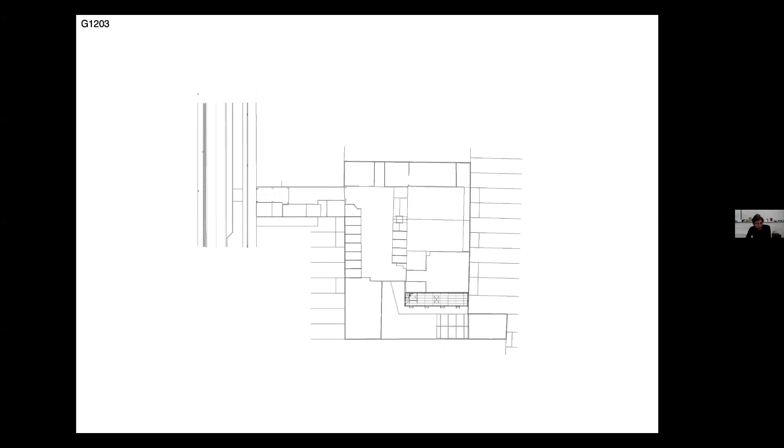So I've selected 6 projects. The first one is a project in Ghent where we did a kind of refurbishment or renovation of an old stone masonry. And you see it's a special location in the sense that you have a kind of courtyard, which is reachable from the street. And then it's really built into the fabric in a very dense way.

And here we stripped the situation and the whole structure, and we cut away the roof of this portion so you could get a garden. And then we convinced the client, instead of his initial question to kind of fill the whole space, to build a more modest, smaller house within the existing hall.

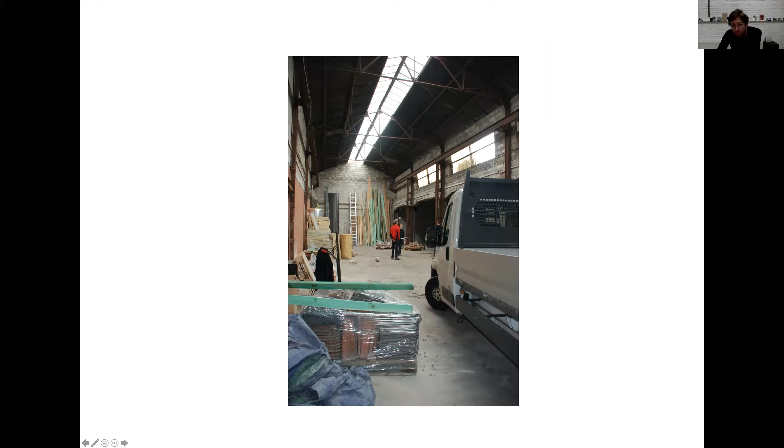And we were intrigued by the systematic base, which was a concrete structure, and there was a steel structure built into it. You can see it here. This is the concrete, and then the steel, which was later put in, and you could already see the layers coming. So they cut away the concrete beams and made a metal structure in there.

So we decided to add another layer to extend this kind of knowledge, to take simply the same base of the concrete rhythm and the steel, and then within the same rhythm we actually copied the structure in wood. And we were intrigued by a simple fact you find a lot in these old structures. This is a concrete beam with a kind of extension in concrete, and then the secondary beams are not on top of the columns. So they actually take 1/4 of the span.

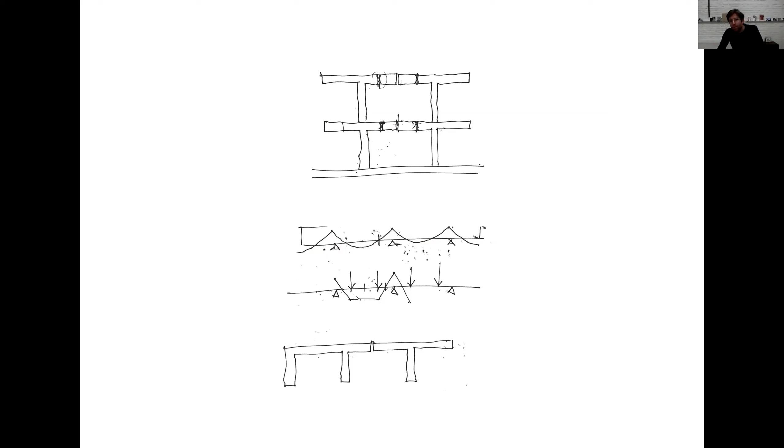And we copied this system because we talked with our engineer, Arthur, and he said it was an interesting way of optimizing the beams. And this is his first sketch. And basically by copying it, we optimized the structure, but at the same time, we also built into the fabric. And it's very important for us not to do a kind of pre-intervention. No, it's something that has to grow from the space.

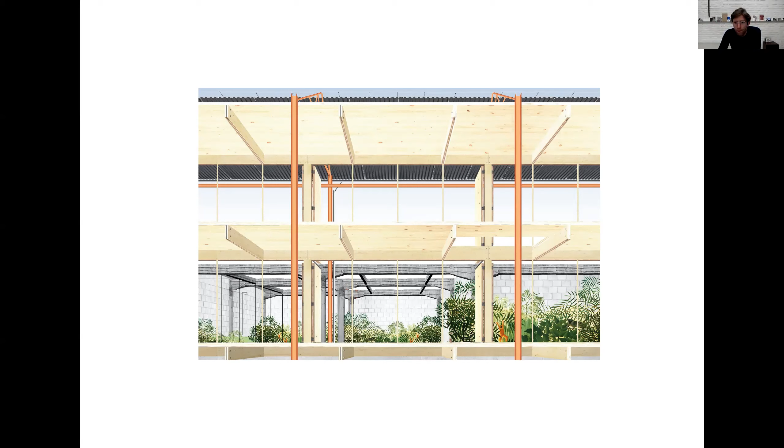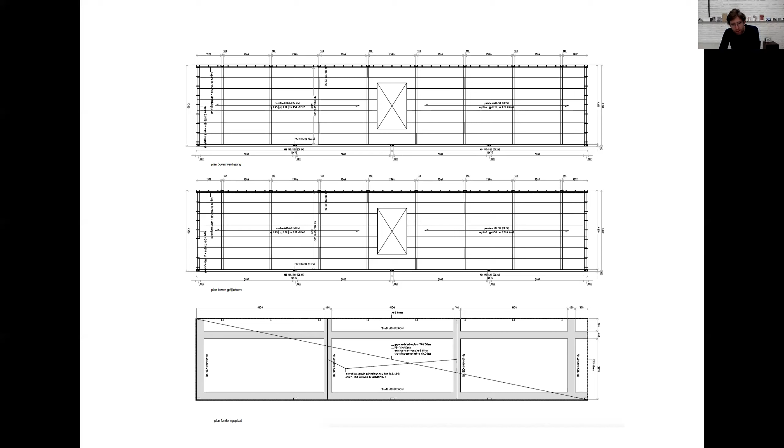And we simply did it at 3 levels, the ground floor, first and second. And we thought of it all in wood as a structure. And this is the drawing of the engineer, which basically is also what we did. Our projects, especially the beginning ones, but still a lot of times, have limited budgets, and you have to do as much as you can with the limited elements that you get. So the drawing of the engineer is basically almost a finished project, you could say.

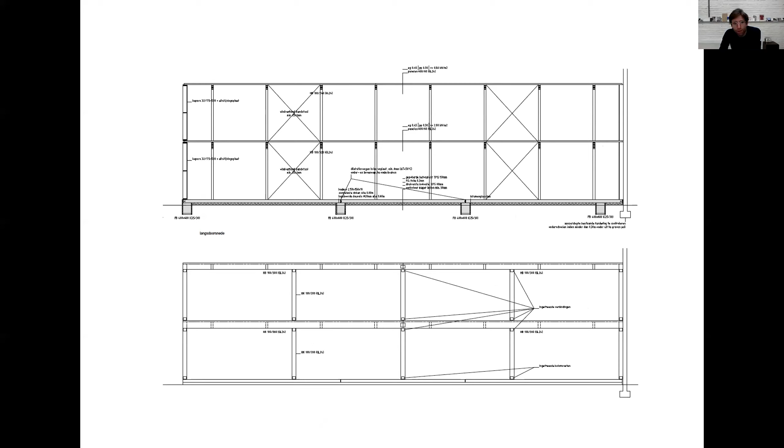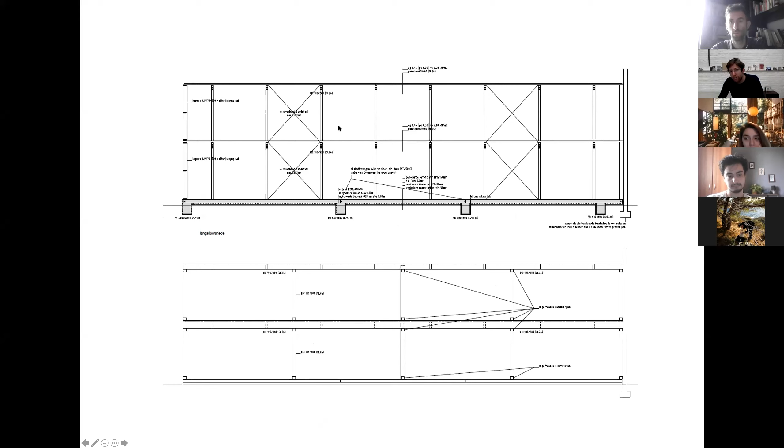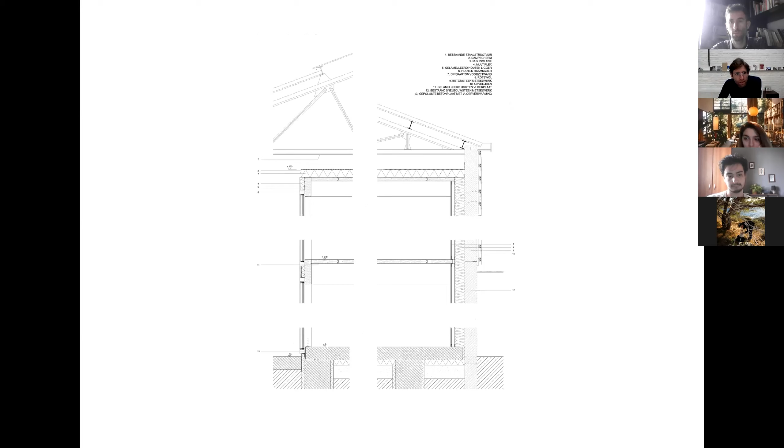What was interesting is that we did the floor and the roof in wood, and there are boards of 60 centimeters wide, but 6 centimeters in height, and they're already the ceiling and the floor, so there's nothing extra. There are no extra layers added, so it's already a finished product. And here you can see the construction drawing. We simply added a layer on top of it to finish it, because we really like the idea of a kind of basic structure that can be finished by the client.

And here are the details. And so the structure is perfectly clear. And then we added standard windows on the outside, but simply by managing interesting details from the inside, you get a kind of frameless idea of windows, but actually they're basic, cheap wooden windows. Just by applying them in the right way, you get this extra detailing.

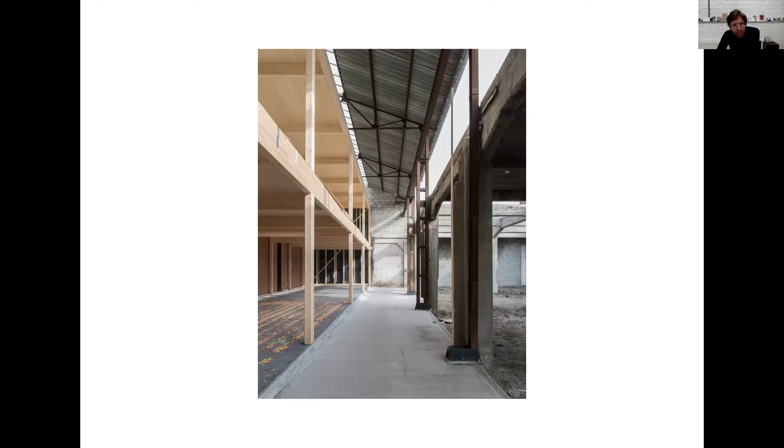And here you can see the basic structure, and there are no bearing walls in it. So it's all being done in different phases in the end by the client himself. We basically had almost a building package, you could say. But of course, we do manage a lot or think about the way the elements meet.

And here you can see it's almost like a massive wooden construction. But if you look closely, it's actually metal bars which are rammed into the wood. So you do not have any bolts or anything. It's just a way of dealing with friction in the components. And that's why it's almost made in one piece, you could say.

And this is then the structure. And for us, these construction moments are very important. We also do our photography ourselves, and we go to the site, and basically then something already has to happen.

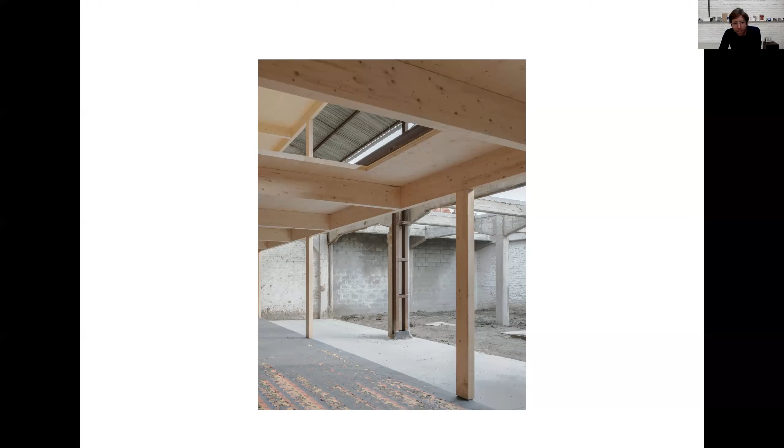It's not that we wait for the finishing; the energy of the project should already be there. And we're very conscious of the idea that this is a primary structure which you actually give to the client, but also afterwards he can sell the house and somebody else can make it his or her own. And in that sense, it's almost a kind of framework for life, you could say, that we offer.

And this is the way you approach the house. Here you can see. So what we did is we kept the initial shed structure. And what we did, of course, is to build smaller than the width of the plot. So you already see here the canopy that serves for the protection against overheating, but also to have this kind of flexible in-between space.

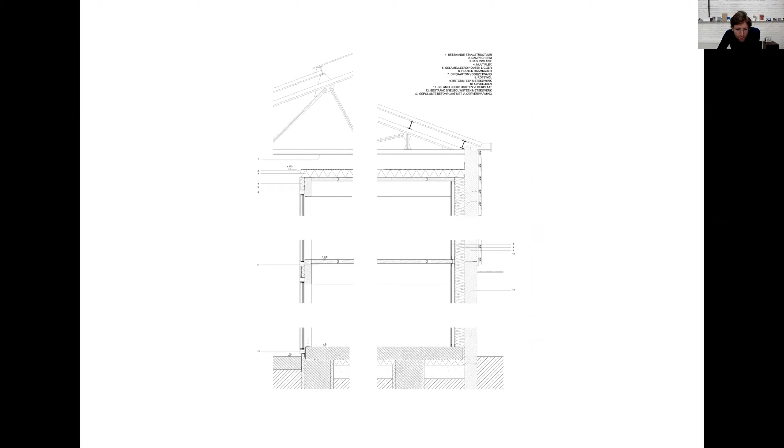And maybe some nice things to prove that we really try to find the edge. If you see the floor, this is a basic concrete floor, but it is already the foundations that you see. And maybe I should go back to this actually: the structural floor is on top and the insulation is in the bottom. So there's no extra layers on top of the foundation floor. And in that sense, it's the most basic you can do.

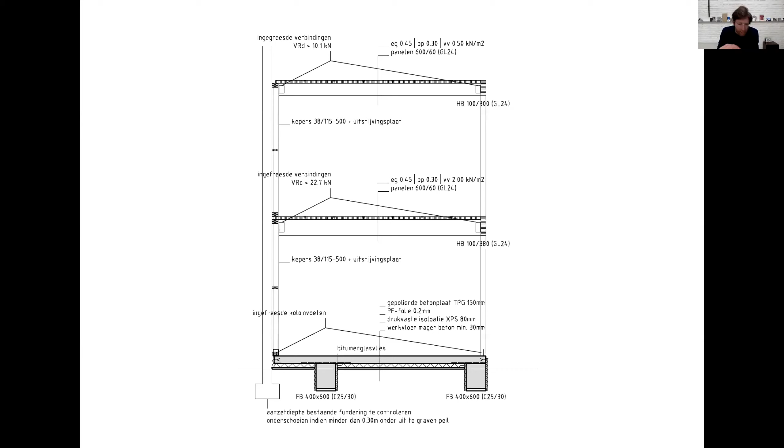It also limits the discussions with your clients of what type of floor should be in the end there. I mean, these are things that you will all experience, these kind of nice discussions. And because of just limiting to this and it's only budget, what we did was polish the floor, and you see the stones basically in there.

And what's of course important with the engineer, he thought of a system. They use it in industrial construction. Here you can see this line. It's a metal reinforcement which allows the structure to move in a horizontal way, but not in a vertical way. Because the floor heating is also attached to the reinforcement bars, the structure would move and it would crack, because it's 20 meters long, and you would simply get cracks in your floor.

So in that sense, it's using these industrial ways of working, because that's the way they do it in industrial buildings, but finding a new way of applying it here. And it's interesting that people ask, okay, what kind of stones did you put in your polished floor? But it's actually just simple concrete which you polish. And in that sense, it's interesting for us that people often find things beautiful because they are logical, or something has grown to be beautiful simply because it is simple.

And as soon as people start to have to make choices, it's more difficult. You really need this taste level to kind of fix everything. But that's not what we do. We basically make a kind of package, and the building comes from these decisions actually.

And then a simple idea is that the opening windows are closed; we fix them with wood, and then the fixed windows are glass. And the idea is that in the summertime you open up the shutters, you could say, and then the whole box is transparent. So in that sense, you play a bit with open and closed particles.

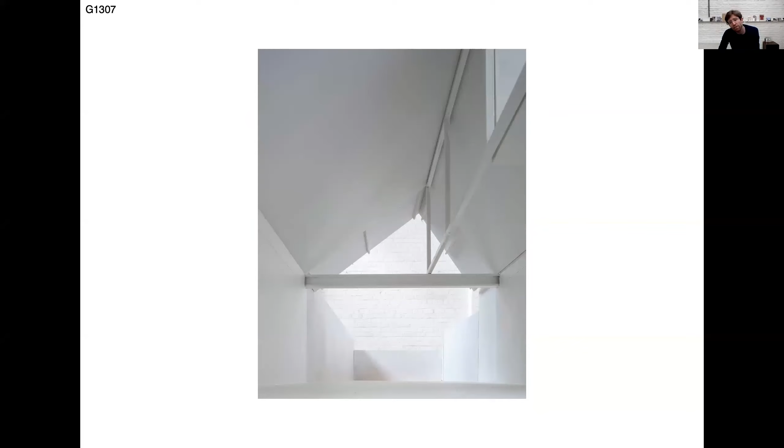This is a small extension we did also for a friend of ours. It's a very typical, common work among architects. It's usually the first things you do, these kind of extensions here in Flanders. And it's always a limited budget, but also how to make something that is particular, how to deal with always the same question, but giving it value.

And here we wanted to give as much space as possible. So we had this sloped roof idea. And we had these discussions with the engineer. When you do a sloped roof, you have these kind of forces and you should put cables to hold it together. And we wanted to avoid these because it's quite a big roof. And we came up with the idea of stiffening the central beam, and not by making it heavier, because we didn't want that.

We made a Vierendeel truss, which is 2 meters high, but very thin. So in that sense, it's a very delicate element. But we really like the idea of being stiff in one way and almost too thin to be constructive in the other. And we simply laid it on top of one beam, which is on top of the party walls.

And here you see again, we try to find clues in the existing. For example, this line is a very typical line because of the stairs. And then we continue this line, so there's no discussion about this line. So in that sense, we always try to find these alibis, you could say, which tie the project to the existing. And in that sense, it's a very simple plan.

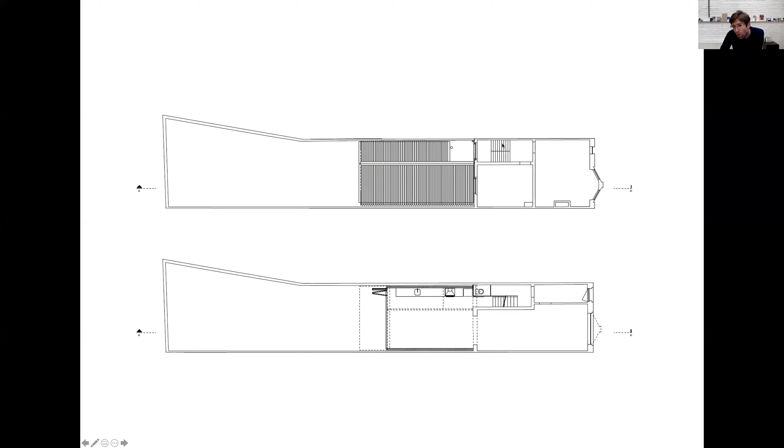And then obviously, if you have this kind of roof, you have this window, which is a bit lower, which is here for the staircase. So we simply cut out a portion of this roof, and then we could also bring light in there. And by dividing the Vierendeel truss, into 3 squares. You can have one which is a window to get light in, because we cannot handle the idea of just putting a roof light somewhere. We want to know why, how big.

So this is just simply a system, and then the problem of always bringing light into the darkest part is in that sense solved. And also what was interesting is with the engineer, we came up with the idea of this Vierendeel truss. Because of it being very slender, it is not a frame. So in that sense, it's more like a truss. You have this kind of diagonal, and you could have the same on the right side.

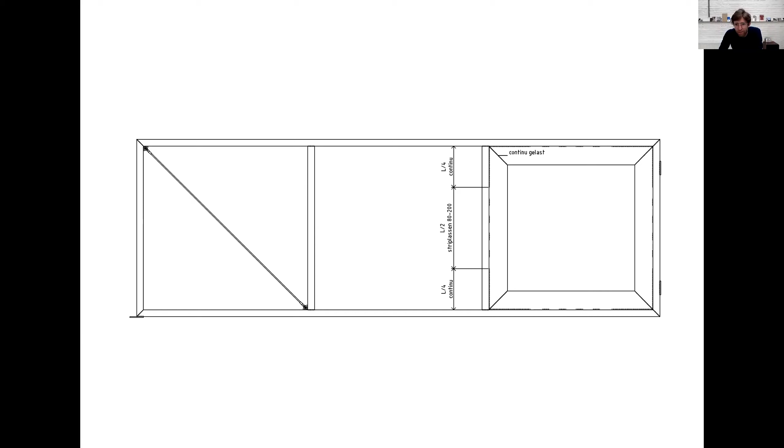But as you can see, you also have the thickness of the roof with the insulation. So we had another way of stiffening it, and what we came up with was just a thick plate of steel, which is welded all the way through. So it's the same way of stiffening this, but in another way. And of course, by that, you fix the thickness problem. But we like it. It's almost a kind of educational drawing of what types of ways you can make it stiff.

And this is the element we had to put on it. The engineers or the contractors were saying it's really unstable, but by putting these insulated panels on 2 sides, you can stiffen it also. So again, like a lot of architects, we're very influenced by Prouvé, the way of using standard elements, trying to find something which is not generic, which is very contextual, and also the hybrid character. Every element works, and in the end, it's a whole. Every element is at the edge of the forces, at the limits, and that's what really interests us.

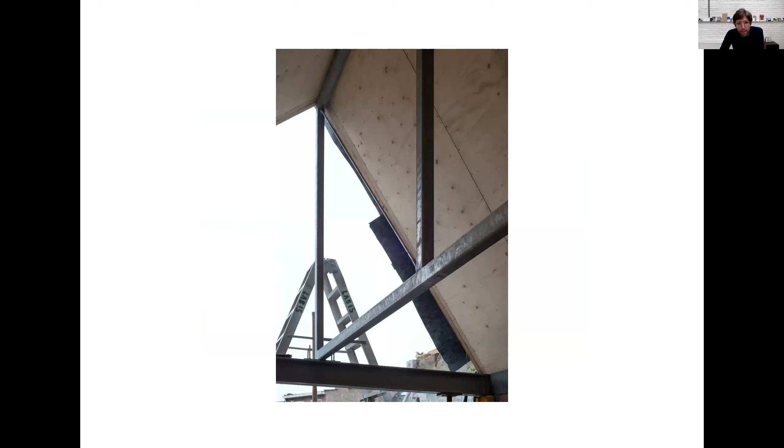And these are a few construction pictures, and this is the final picture we took. Also here, simple things. We wanted to have a kind of canopy, but something very simple, so we had these Z profiles you can see there, which are used in this type of steel construction. Because it comes from the roof, you can have them very slender. Normally you would have a thermal break, making something very heavy. Now we come from the roof already, so it can be very thin.

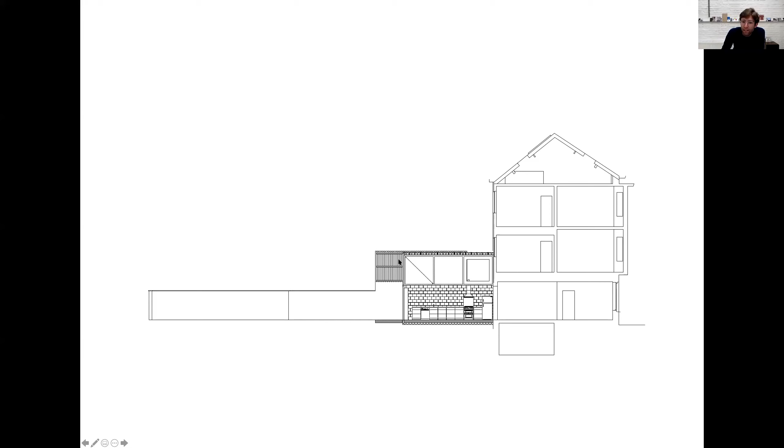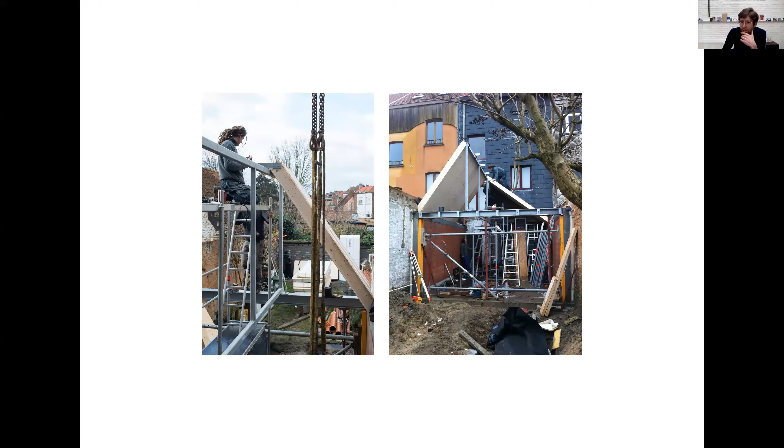It's a Z profile which we doubled, simply putting two of these very thin profiles into each other, and that's why they're twice as strong. So with these basic elements, which you would normally already need to fix your corrugated metal, you can already make a kind of span. So these are very simple things, but we like the fact that you could almost build it yourself. These kinds of things are of interest to us.

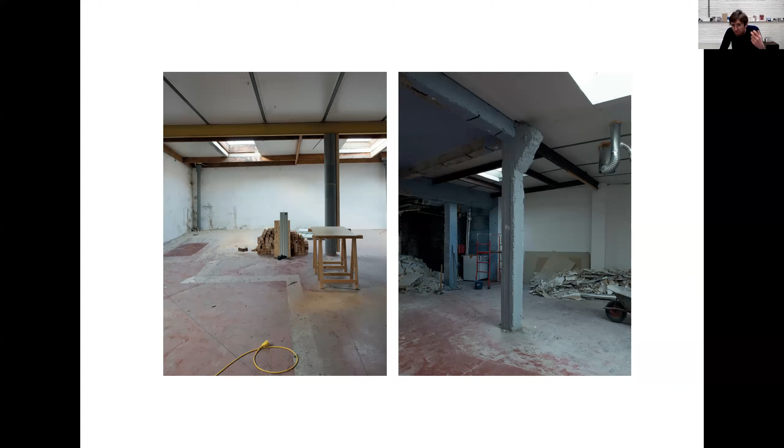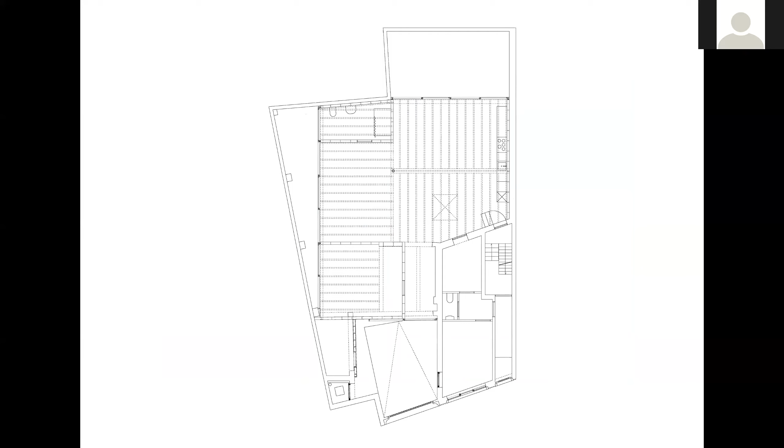And this is the plan. Here you have the front house. Then we integrated the biggest rectangle we could as one large space, and the leftovers are the outside spaces, because we really like to do one basic action, and then things should come. So the outside spaces are just a result of this simple action.

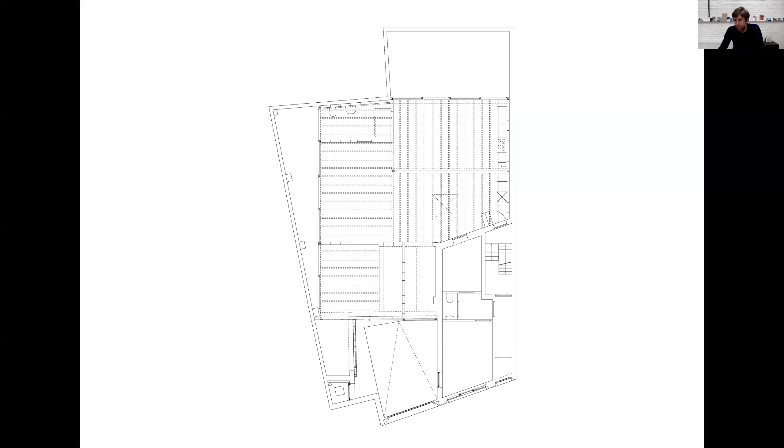And then you see that the project is basically a whole wooden roof, and there's one column, and this is this round column. It's nice that if you have one column in the whole project, this column starts to have a kind of importance somehow.

Then we had the party walls, of course, and the layers of the rooms. We did it in this insulating stone, which is normally the first stone in your construction because it's cellular. But we decided to do everything with this stone because of its insulating capacities. Of course, it's very delicate. It's not normally used for this type of construction, or at least you should normally plaster it. We didn't, so we really took care of this stone on the construction site.

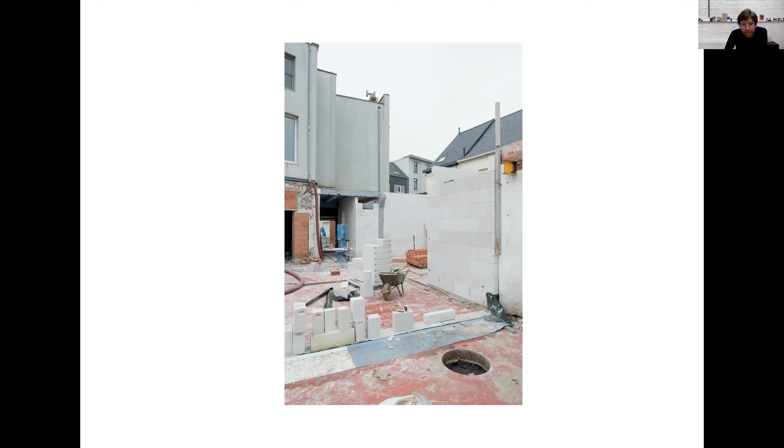And we built on top of the old existing floor, because demolishing it would have been too expensive. It's also nice to keep this as a layer. And then we simply cut big holes to put trees in there.

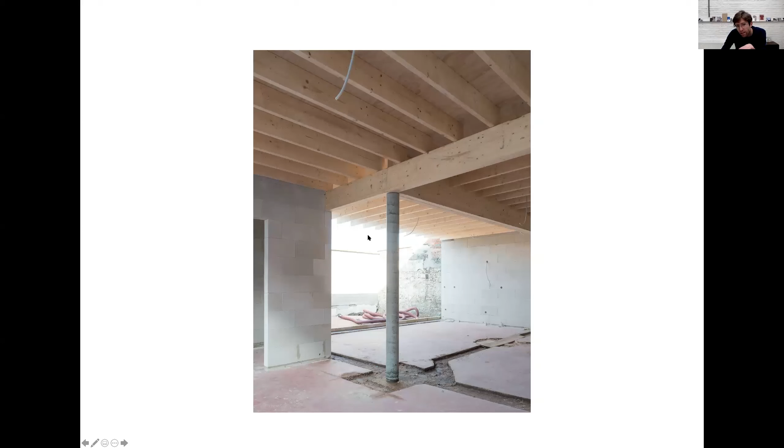But instead of putting a beam underneath, we did the reverse. Normally you have this higher portion to close the roof, but we made it structural. So we had an upside-down beam on top, and we hung the secondary beams from it. That way more light enters the room because you don't have the beam underneath.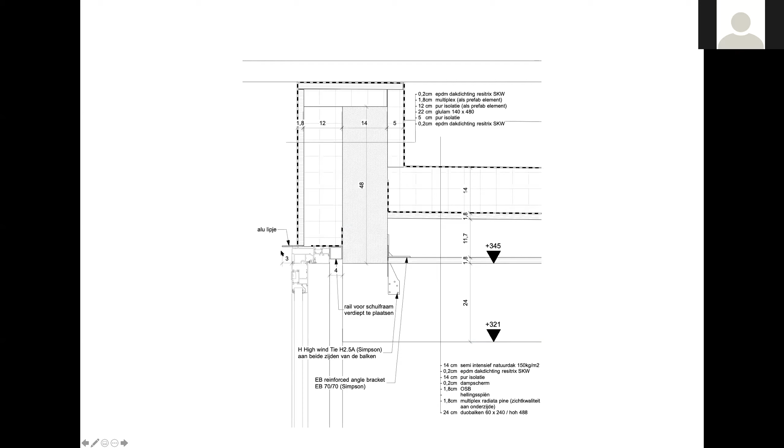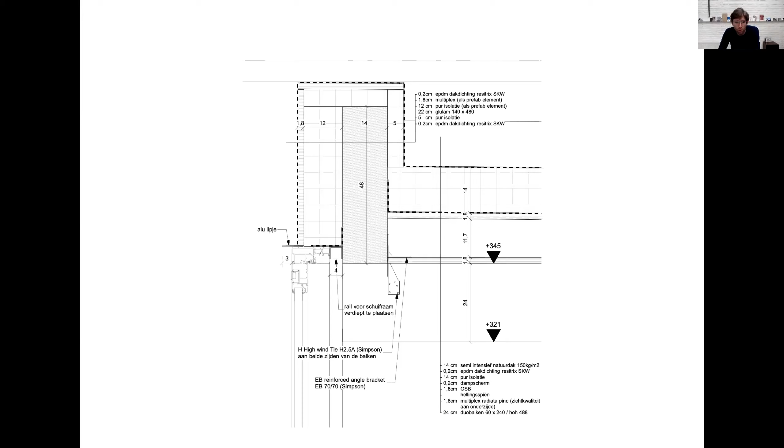And simply by detailing basic windows, but higher, you have the same idea: from the interior you see less frame, and on the outside you can see it. As a finishing, it's all roof material, which we just continued all the way. We try to finish the structure with these basic elements, because in terms of costs, one contractor doing a lot is easier than many different materials. So we keep it very basic, and that way we have control over the situation.

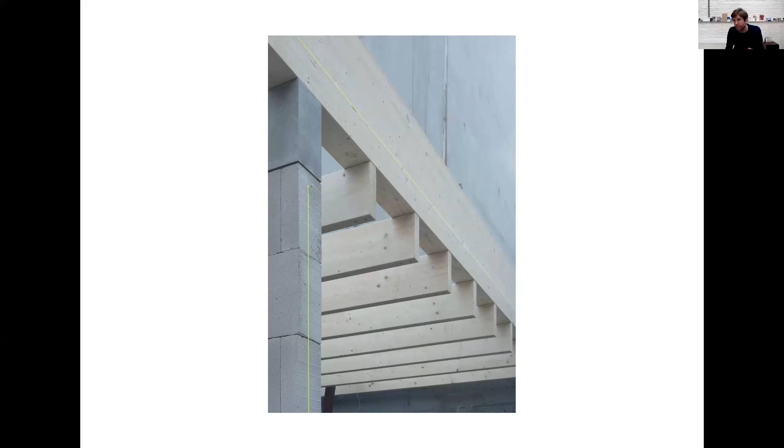Here you can see the beams suspended from the upside-down beam. And when the forces become too heavy for the stone, we have prefabricated concrete elements of exactly the same size as the stones. These are things we look into to get right, because if you poured it on site, you could never get it right. So it has to be prefabricated.

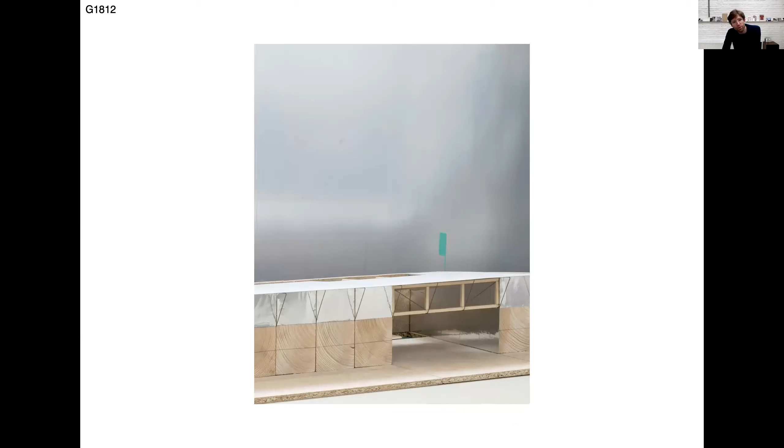And then a bit bigger project, which is for a woodworking company, which we got to know very well. They worked at the site. We are at an industrial site, and they also had their factory there, and we kind of started working together. And now they asked us to make their own factory, the new factory.

And it was an interesting experiment because of the scale, but also again limited means, and trying to work with basic industrial elements, because if you look at how these buildings are made, there's a kind of very fixed pattern of the concrete system that you always need to use. And we came up with an idea.

First, of course, they wanted their production hall, and then in front they wanted this fancy office, right, to show who they are. And we convinced them, okay, no, just do one nice hall, because that's what you are, that's what you do, and try to invite people into your world, you could say. And we came up with the idea, instead of a front parking and then this fancy office, we actually put the whole building more to the front.

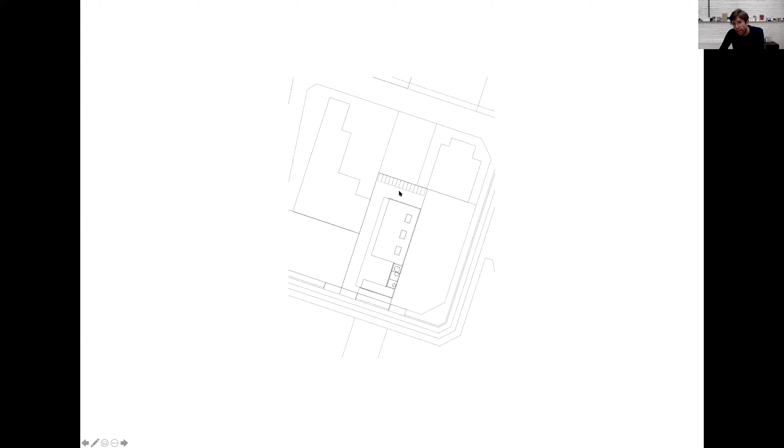So you get a limited parking at the back, but we came up with the idea of a kind of covered space, because they also had to get the products there and then unload. And we offered them, because we really needed to convince them, because it was not easy, because it was extra and basically they didn't need it, you could say. We offered this very big covered space as an entrance space as well for the unloading dock, but also for the offices they had. So you can come into this world, you could say.

And then we had a simple concrete column system. And of course we had to cut this with the Vierendeel truss, which you remember from the past project. That's why I put them after each other. They're like simple ideas, but you get them into your head and you take them to the next project, you could say. And there you cut them, and then you put the Vierendeel truss.

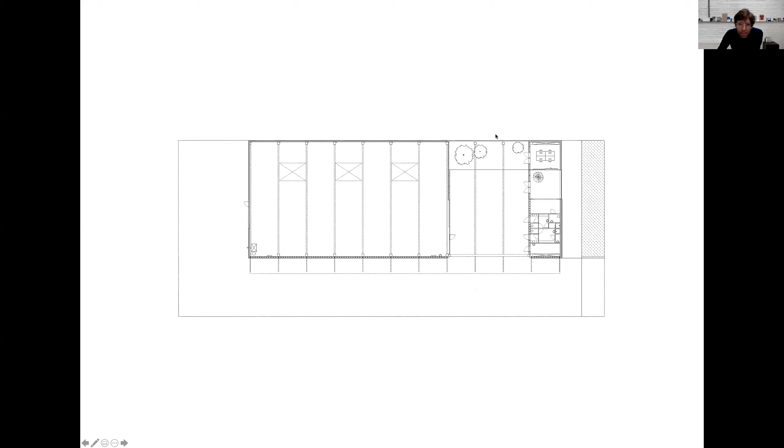And then here on the right, you have these offices, very slender in one bay. And then you have the covered space with a kind of outside courtyard. And then you have the main production hall. And these are the three different sections of the site. On top is the production hall. Then in the middle is the courtyard, which is open at the end. And then you have the working space, you could say.

And then these simple different sections always give you a kind of, with the same facade, because you have 4 meters of glass, and then we have a wooden facade. So you have here a very top lighting, and then here it's covered, and then here, because you're working on the first floor, you have a different relation with the roof light.

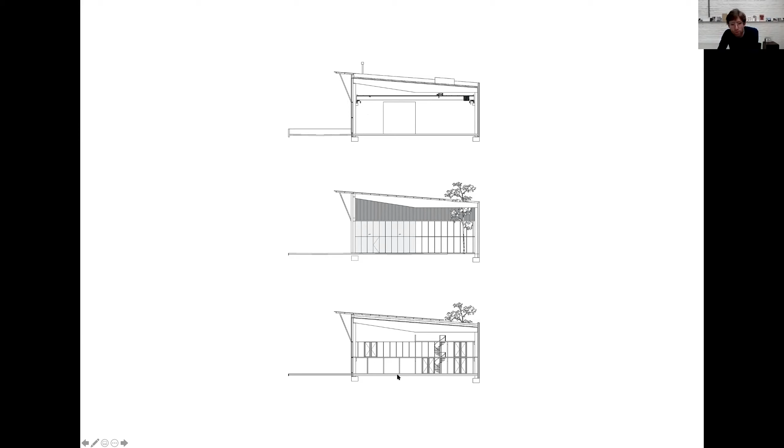And then, of course, important to say is that for fire regulations, we had on the other side a concrete U shape, but then we put it fully in wood. Because of doing that, obviously they could make it themselves, but also we decided to cover it to protect the wood, and that's why you have this kind of shadow also for the window lights you have above. So it's a kind of double way, but it's also interesting to have this character on this side, to really have a different expression, you could say.

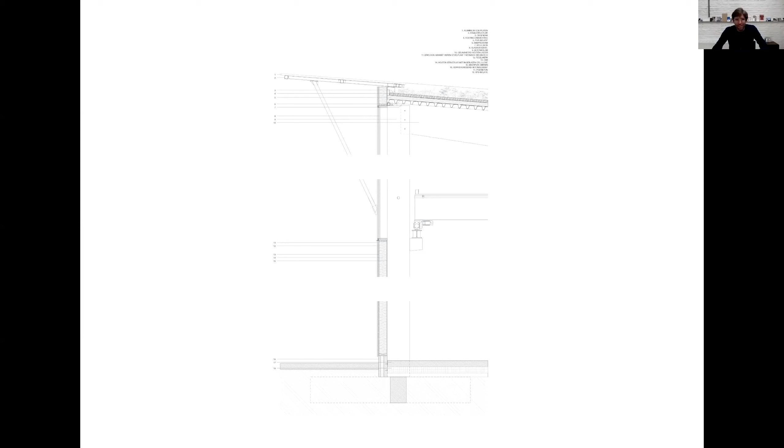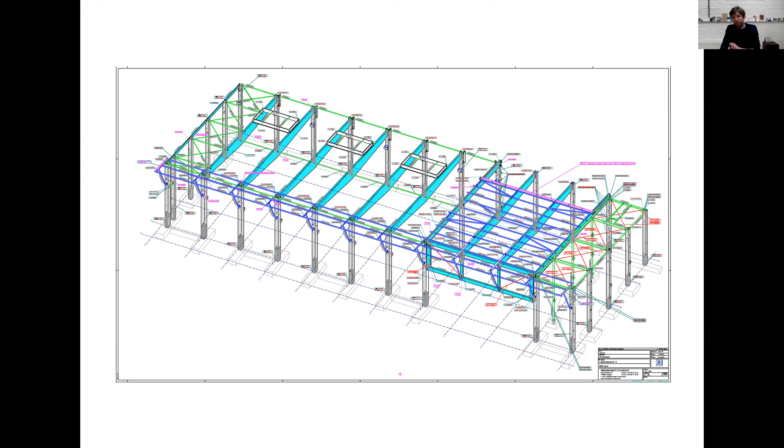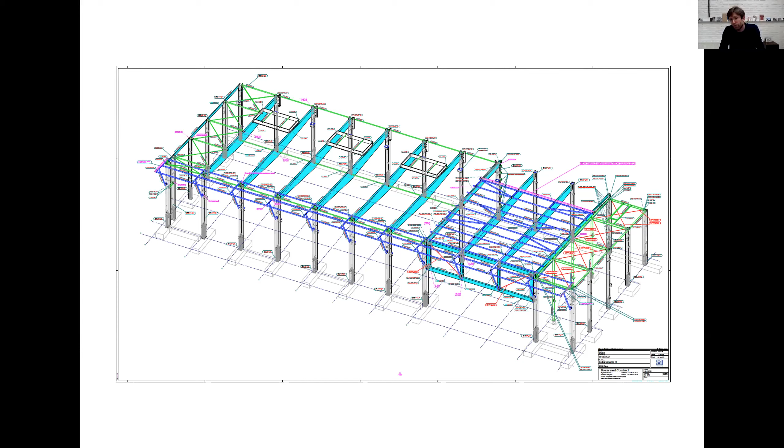And this is then just the way you get it back, and then it's a way of negotiating, because it's again limited budget. They're also contractors themselves, so they kind of rely on us to ask some questions. We draw some details, but it's not like you have every bolt under control. So it's always a kind of negotiation, but it's interesting because if your ideas are strong enough, then usually they will stick. And in that sense, because of course you know each other, you can have this interesting dialogue.

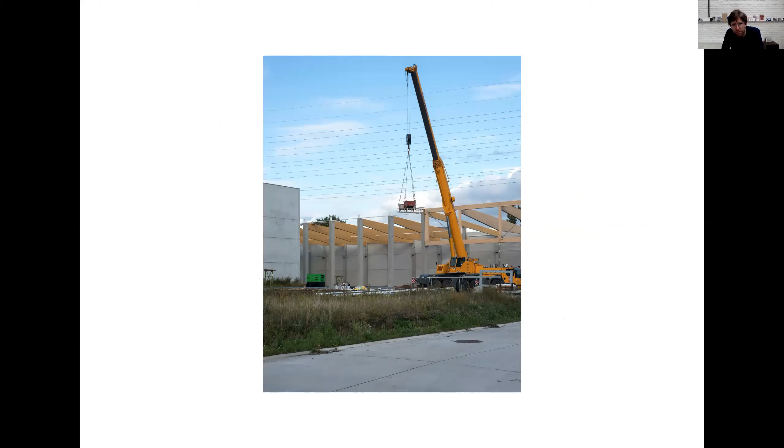And these are a bit of the construction photographs. And the scale was, of course, impressive for us because of the height. And this is the Vierendeel truss as it was first erected. So again, at the construction site, there should already be something which attracts your eye.

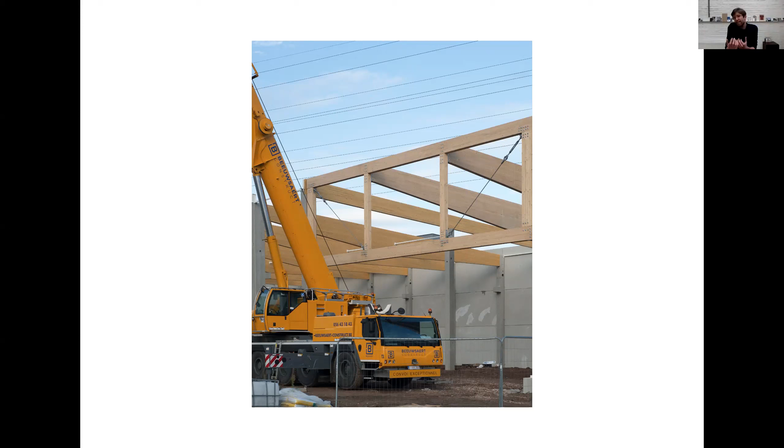But it's also just taking something they always use, because they're building a lot of factories also on the other plots, and they're all using the same thing, but as a normal thing. So it's basically looking how you can do something else with the same element. And that's what we really like. These are the canopies as they're constructed.

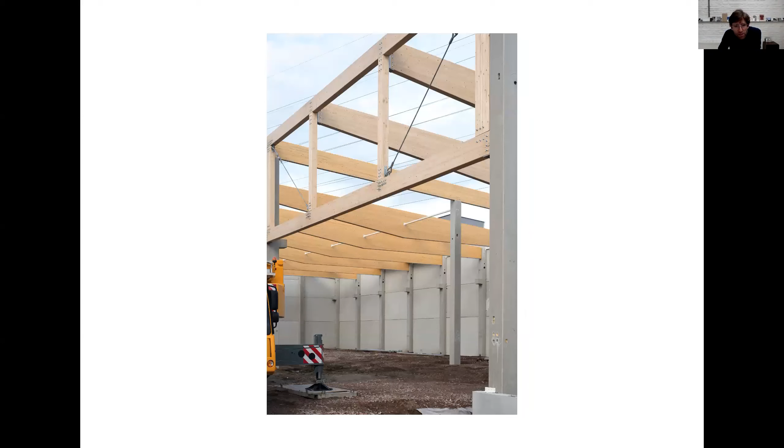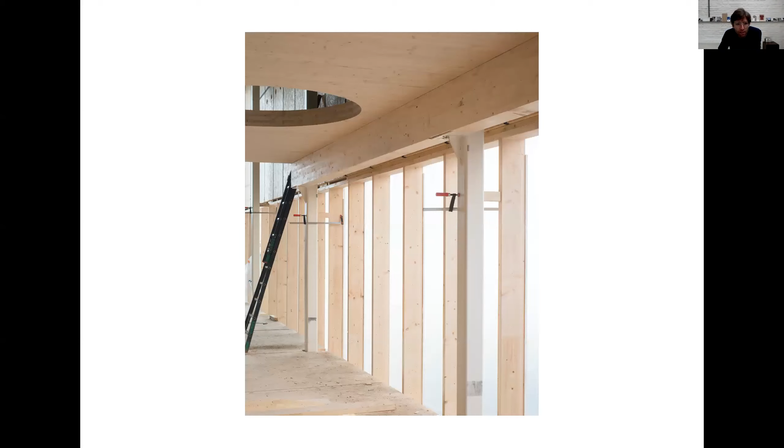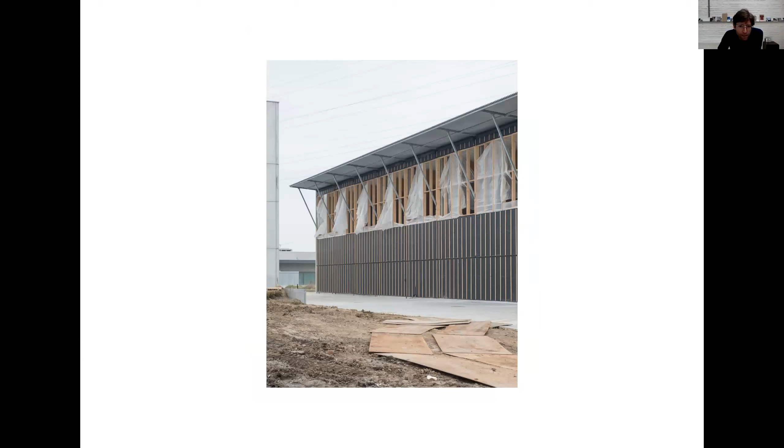And then when they're finishing the interiors of the space, and this is the offices, which is cross-laminated timber as they built it within. So it's a timber structure built within the concrete structure, actually. And then when they were installing the facade, we really like the play of rhythm of all these elements, which have their own logic, but brought together, they become kind of complex systems.

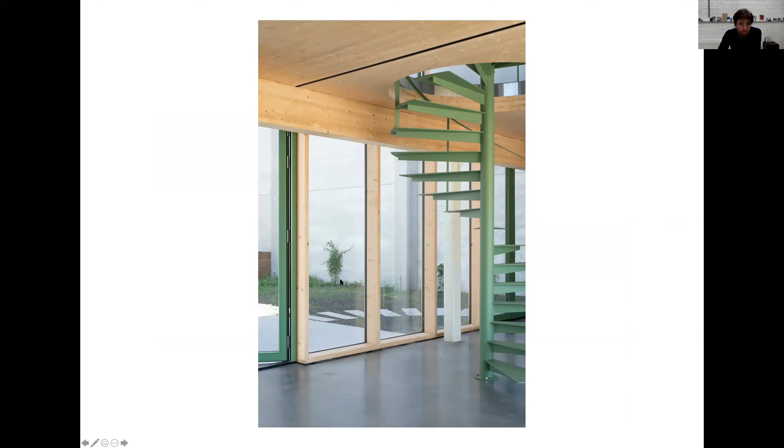And this is the interior of the factory then. And it's always the direct relation with their courtyard, which makes it interesting. And this is then the facade as it is finished. And now they have constructed something against it. They made this themselves, but it's actually interesting that they continue to kind of build this thing.

And then the last project is a chapel we are refurbishing into a house, and of course, very interesting is the location, but also the heritage was this kind of negotiation of how to deal with this heritage. And what was important is that we did something which was reversible. So you could do something, but you have to be able to take everything out, and then the chapel is untouched again.

So in that sense, we came up with an idea of making a steel construction within the old framework of the chapel. And also here, the client is a metal worker. So in that sense, it of course made sense that we did everything in metal here, and then we have this close relationship to design all the details with him.

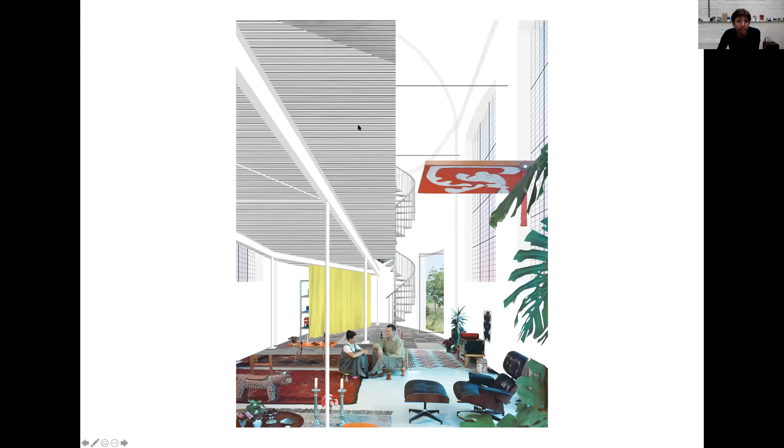And the main idea was to have a kind of central beam, which is the longest possible, which enters the chapel. And then you have this kind of ceiling on top of these two lines, which is in metal steel deck. And it extends to form, on top of it, a hallway. Here you can see the different levels. We put just simply 2 levels, and this is a central beam. So again, it's a play with this central axis.

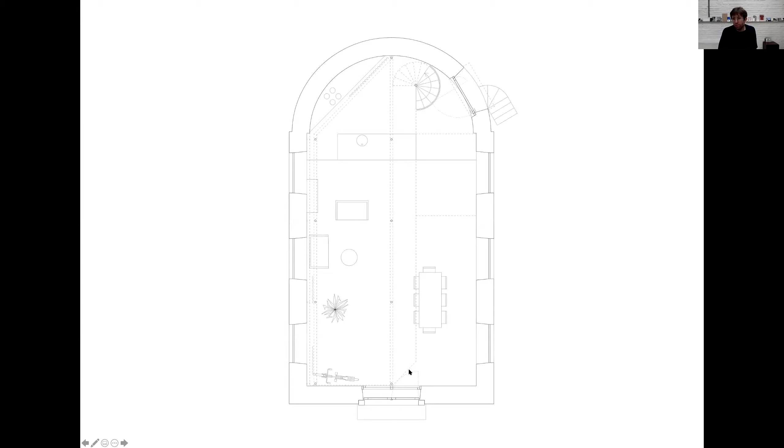And what is interesting is that we suspended the steel deck. But of course, if you would continue it all the way until here, you cannot enter the door anymore. So we closed one door, but then we cut away on one angle to be able to open the door. So again, there we go to the very limits of what is possible, that there is a kind of friction between the old and the new. That's what we like. That's what makes it interesting. It's not possible to shift it a little bit or something. It has meaning to the place.

And then here you can see the construction, and we did a lot of work on it. It is not welded on site, which was not possible. So it's prefabricated, but then normally you have these extra welded plates and bolts and stuff like that to kind of put the construction together.

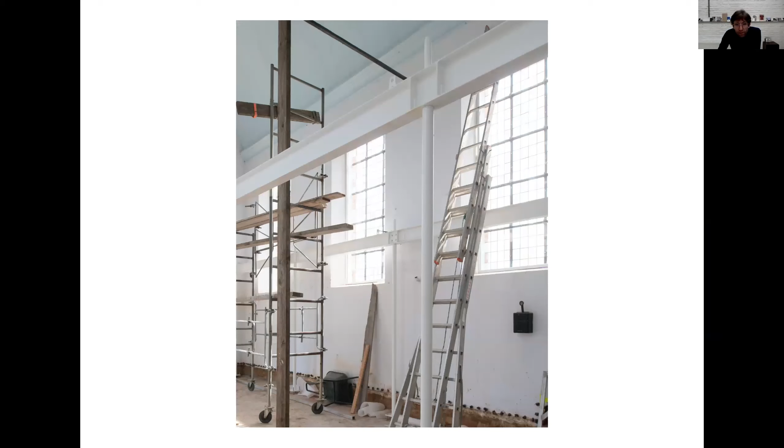And we made a kind of system, here you can see it, it's like a pin which is welded on top, and then a hollow tube which is put over this metal pin, and then you have these fine elements to fix it. So in that sense, it looks like it is welded, and we had a lot of discussions about this.

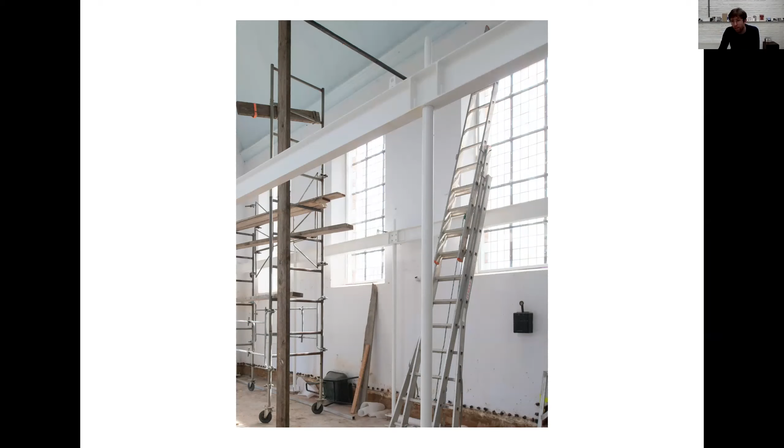It's basically what Mies van der Rohe always does, he welds everything on site, which for us is not possible. But it's interesting how simple he gets his construction, and how it is about construction, but it's also about the refinement. And we really like this delicate balance.

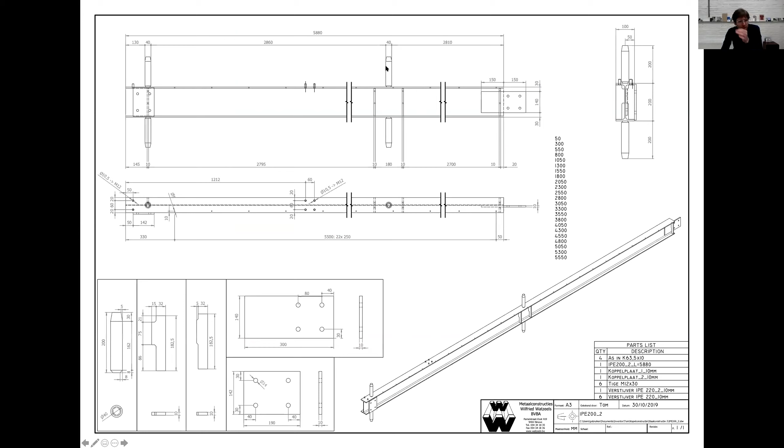And here are some of the construction drawings. I won't get too much into it, but simply because the beam cannot be in one piece, you can have an interesting element to join them together. But it should also have the beauty of the connection itself. So it's all things that we like to think about. And of course, I think these tubes are 5 centimeters, so they're very limited. So this kind of delicacy is also of interest to us.

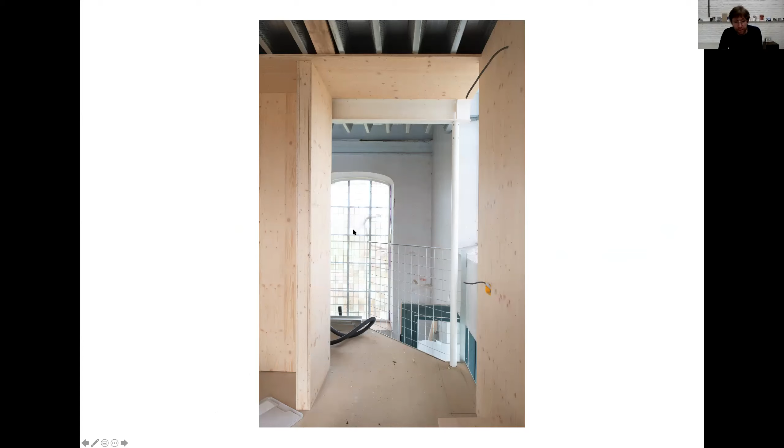And here we're now starting to finish the interiors. So everything is built in wood. And then also interesting, just simple things, like how to make a balustrade, a kind of protection. It's interesting because it's a dry system. So the steel deck is higher than normal because we do not have a concrete layer. So it's a bit higher, and there's only a wooden plate on top of the steel deck. So basically you don't have anything to fix your balustrade to.

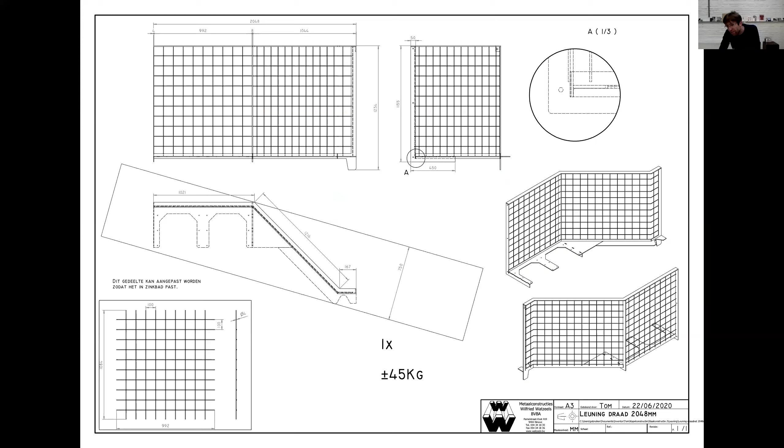It's just thin. The metal of the steel deck is, let's say, 2 millimeters at most, so it's nothing basically. The strength is in the plane. So these simple things lead to more difficult solutions, like welding a plate which is underneath the wooden board, which is on top of the steel deck, to hold it. So it's a very simple thing, but it's something that you need to take into account if you want to have it that thin.

And I just put it in there because these are things that we like to think about. Here you can see this beam of the balustrade is getting into the steel deck. So we really needed to count and to fix this rhythm from the steel deck. And then you have this thickness, which is going into the openings of the steel deck.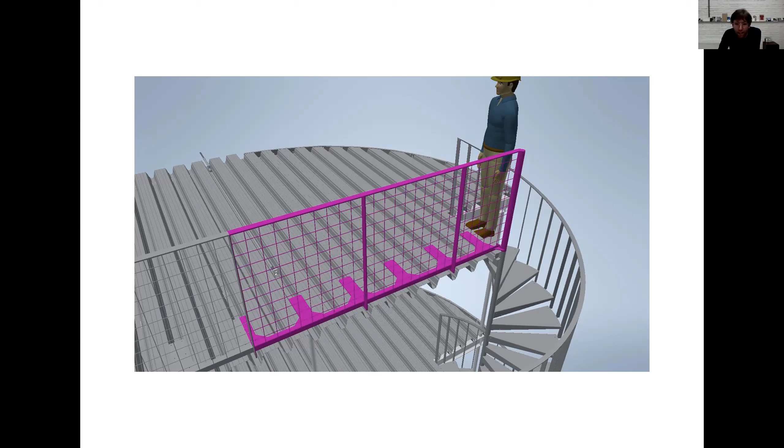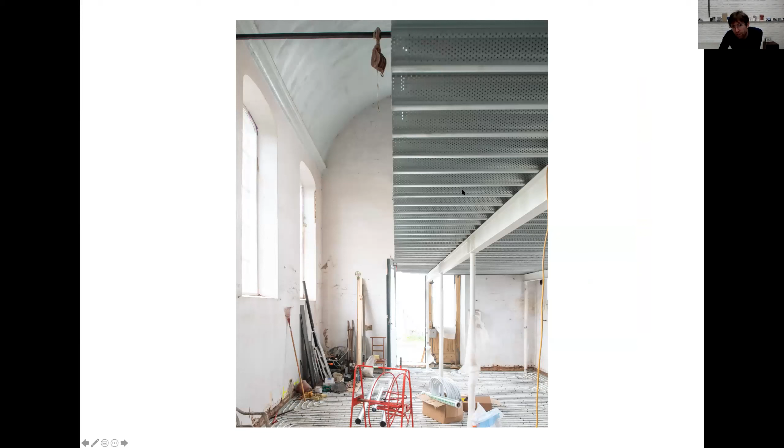So it's a very measured and detailed work, which normally you wouldn't be able to do with a normal contractor. This is just a guy who does it himself. So you can have this dialogue and really measure it and do it one step at a time. So that makes it quite interesting. And here you have the perforated steel deck, it's perforated for acoustical reasons, but it makes it even more delicate, you could say.

And then we put in thermal heating, but we will get the old floor back. So we recuperated it and we will restore it as it was, basically. So in that sense, you get this very thin metal construction on there.

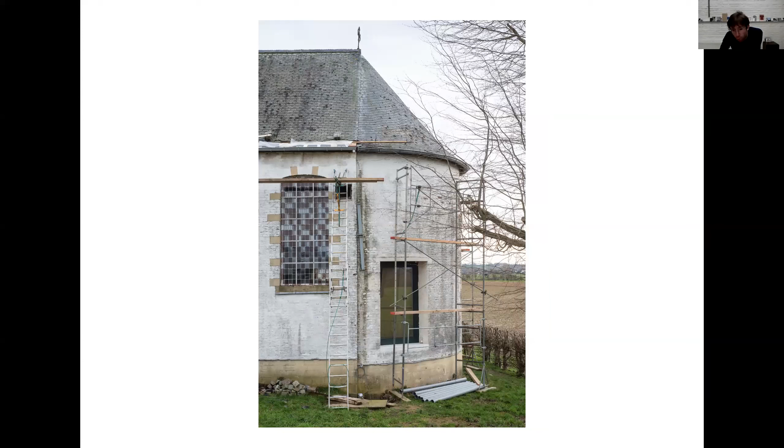And then we put in one opening, which was quite a discussion with the Heritage Foundation, but we figured that with these windows, which we also restored, you cannot have the outside experience. So there's one opening just on the side because the stairs are there. The new entrance to the chapel will be here. We're now making a stair there. But it's also a very clear cut opening, which somehow also has a bit of friction with the whole situation.

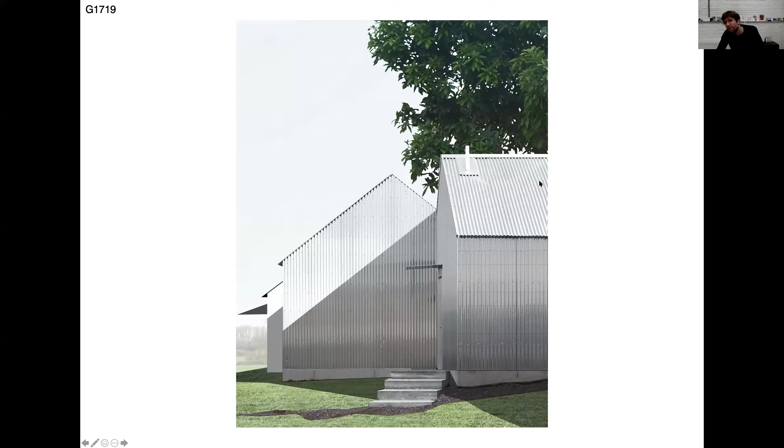And then I don't know whether I have the time. I have one more project. Yes, please do. Okay.

So the last one is a project in Lierde, also in Belgium, which was interesting. The situation we found was a kind of old barn, you could say, and we had to make an extension. And again, there we were looking for some clues. And basically, what we did is we took this volume, we cut it in two, and then we mirrored it along an axis at 45 degrees.

Because we wanted to basically make an extension, and because it was a new material and a new function, we shifted it. And this line is shifted onto this extra extension on the side. So all the lines are there, and with the elements that are already present, you make a kind of new constellation. But we really like the idea that it's a new whole in the end.

And it's also a situation: if you drive around in Belgium, you find these old barns, and usually they try to make a sheltered space. So they build their barns against each other. And there are blunt ones where they simply interact, because you always have to have one space which needs to go to the next space, just by building them together.

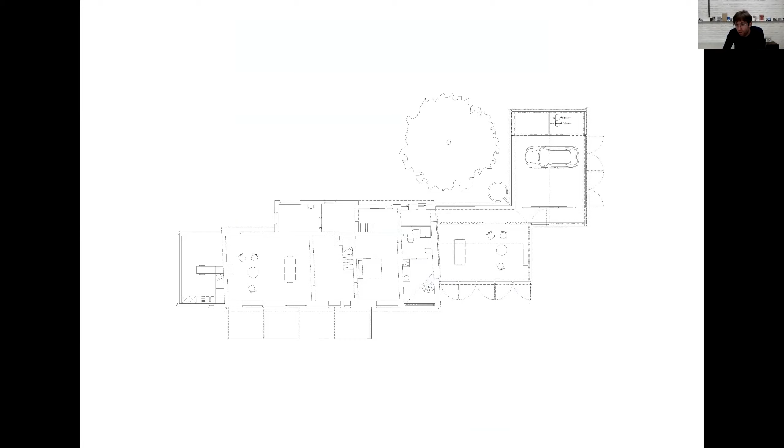You have this kind of passageway, and we try to have this simple system, but we perfect it somehow within this 45-degree angle, and it's a full wooden construction, and it's basically a shell. So there are no interior walls or bearing walls. And here you can see the construction, and it's like a house of cards, you could say. Because of the angle, it becomes a stiff shell.

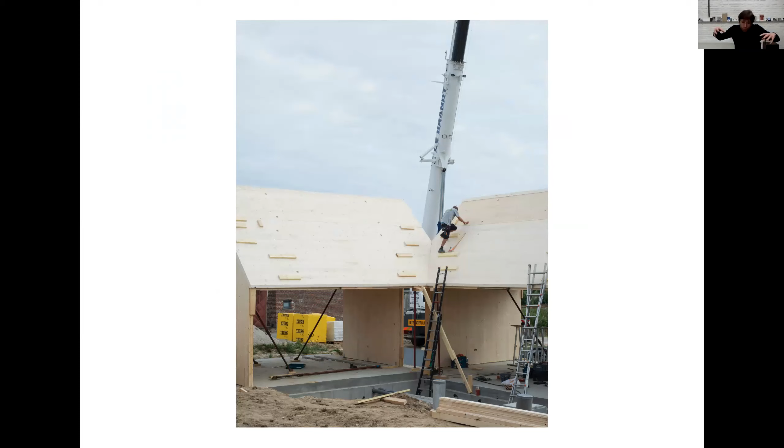And here is the construction as it is being done. So it's very furniture-like work. It should all fit perfectly, of course. And what was interesting to us is this point where these two volumes get into each other, how to make it interesting. And we came up with the idea of making it suspended there.

So to not have a construction point there, but simply putting these two shells together, it's open. So this whole facade is basically floating, you could say. So that was interesting to find. We had this intuitive idea it should work, and then with the engineer, of course, you have to test whether it's really possible. But it worked.

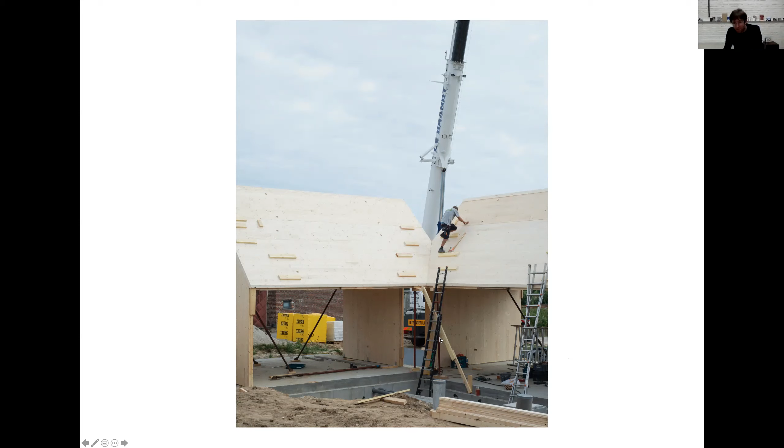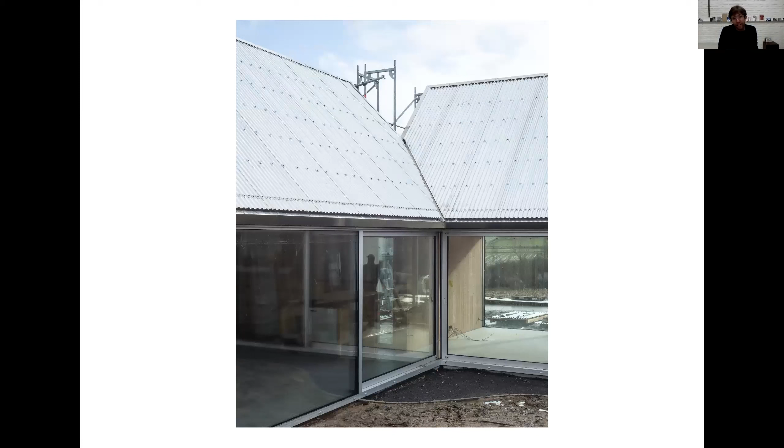But there's always this kind of tension present on site. So here you can still see a kind of beam, and for a long time they stood there, and you're waiting for them to take it away and to feel this construction working. But this tension is always interesting, that you feel it on site. And this is when we are finishing it now with the aluminum skin.

And then we had these windows which can be opened and have this free space, so the two spaces flow into each other. And also we made these gutters by simply folding the metal. So all these details make it at the same time very rustic, really local, you could say. But at the same time, it's an interpretation. So this abstraction together with the situation is what interests us.

And then just finding a way, again, of how to deal with these elements. And these are very simple details. That's what we draw, and it's almost too simple. It's just what it is. But we like to get to this point that this is not what it's about. This is just simply a way of respecting the whole and trying not to let the detail overpower the rest. It's just a simple way of dealing with everything.

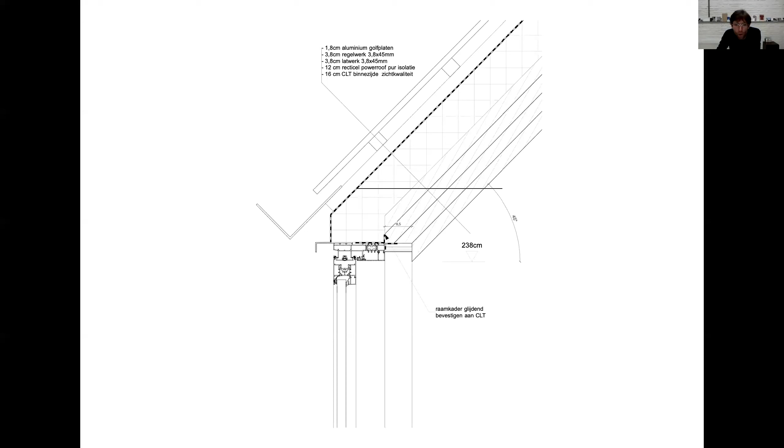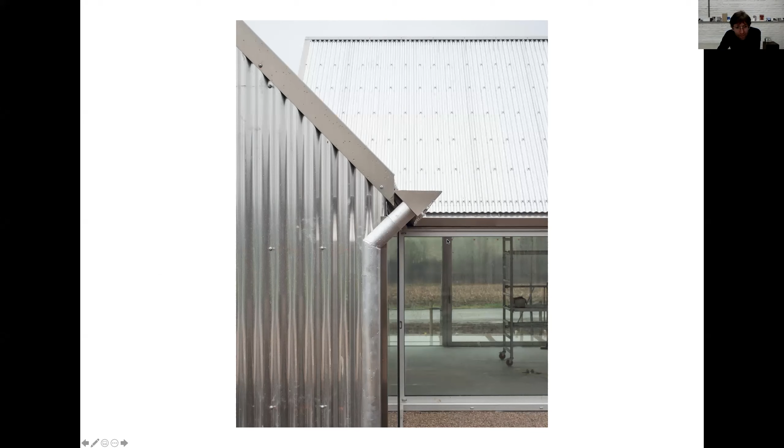But with simple ideas, you always have the same problem: how to get this water to the facade. And just by putting the triangle, it's almost like a logic, a mirroring of the 45-degree angle. All these kinds of things, not too much, we just try to fix it, and when there are some links to what is there, it's interesting for us. It's not trying to find it too much, but being attentive to a simple solution which fits the project. And this is basically what it is now.

And the interior needs some small finishes, but this is the situation. Well, that's it.

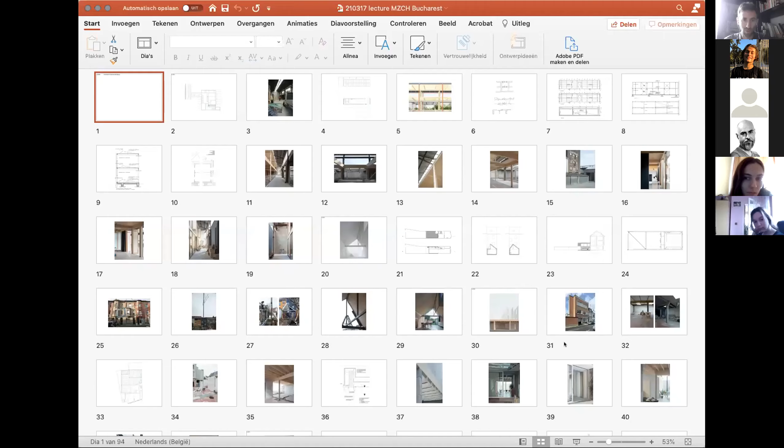Well, if you can, I will share my screen. You're talking about this one, eh? Yes. Well, as you can see here, it's interesting because we had this discussion then. I remember that the price was way too high. You had this German system, I don't know the name, Stabalux, something like that.

And the thing is that it was too expensive and we could not pay it. So we sat down with the contractor and they said, okay, if you have a beam, you can put glass and then have a kind of profile and just screw it to hold it. Basically, it's possible. It's put on the exterior. From the exterior is the window put? From the exterior, yeah. It's finished.

Here you can see the glass, and then these profiles are simple profiles you can get. It's not this expensive German system, you know. So that's also this kind of thing. That's why we really like to sit down with contractors and to negotiate. And you cannot do it with bigger projects, so you have to do it with these kinds of things because it's possible to talk about it.

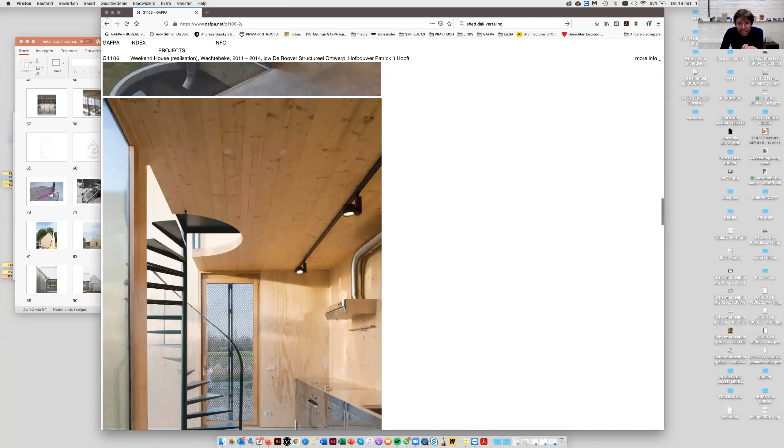And then you learn how some things can be done really simply. These guys think that's what they do usually: how can we do it more simply and cheaper? So you can go along with that as long as in the end it's good or satisfying. Makes it simple. And the same here, the facade is the same U-shaped profile as we did it for the wooden panels. So in that sense, it is the same detail all over.

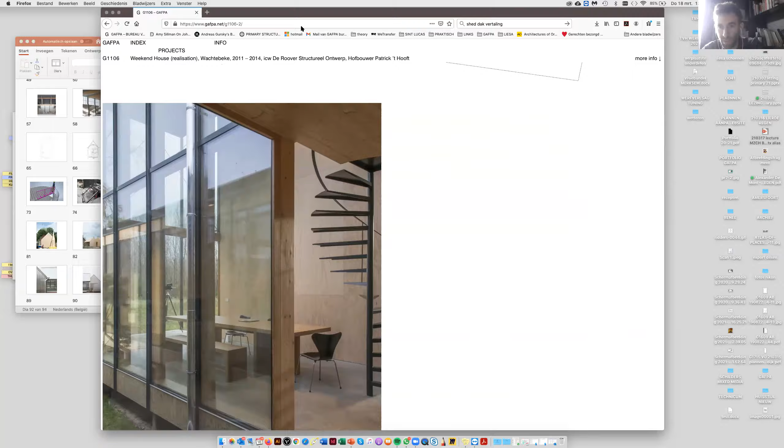Yes. We have a last question. I'm from Theodora. I will read it. I really like the Case Study House number 8 reference. Is there a similarity that you found between the chapel before your intervention and the Eames House?

That's a good question. I don't know whether it's literal. Obviously, again, the same reference is there. Everybody knows the Eames, but again, their own house is the same thing. It was designed differently, and then they came to the site and decided, no, we will build to the mountain. And this story is known, but again, they were flexible enough to rethink their system. So in that sense, that's of course the affinity you have.

Simply linking this project to that, I think it's not in that sense. Well, maybe it is. There's also the steel deck thing. If you look, it's a metal construction basically. So in that sense, it is there. But let's say it's secondary. It's something that you find afterwards, like making the image, rethinking what you do, and then seeing, and then kind of using it. It's also that we do not want to put too much work into our images.

I mean, you find an image which already almost incorporates what you want to do, and then you do it. Because we want all the energy to go to the building and not into the representation itself.

Yes. I also have a question, Stefan. Yes, Christy, please. Because we are in an architectural studio lecture, I have a question about methods or methodology of how you design buildings, because of course, students in second, third year really struggle with how they can start a project or how they can evolve within a project in school. And maybe it's a stupid question for you, but I think it's important for the students.